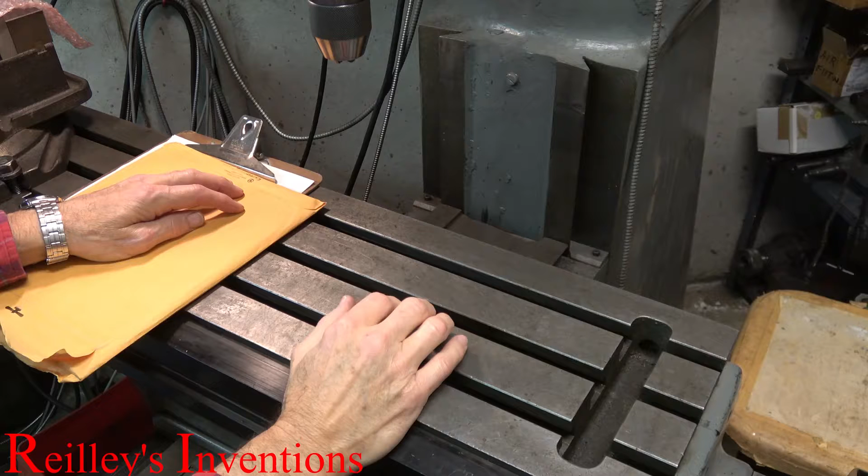I'd like to talk about an invention of mine that projects an image onto a screen. This is a novel way of doing it. Back 20 years ago, when I got the patent for this, projection TVs were a thing, and I thought that this might be a way of building a projection TV using a different method than the then current method of just projecting using lenses.

The advantage of this is that there is no focus. It never goes out of focus, very similar to a pinhole camera, and it uses the idea behind a pinhole camera for one axis only. But projection TVs are no longer a thing. They were a thing 20 years ago. I have no idea what use there may be for this these days. The patent is expired. I'll show how it works, and you can use it however you like.

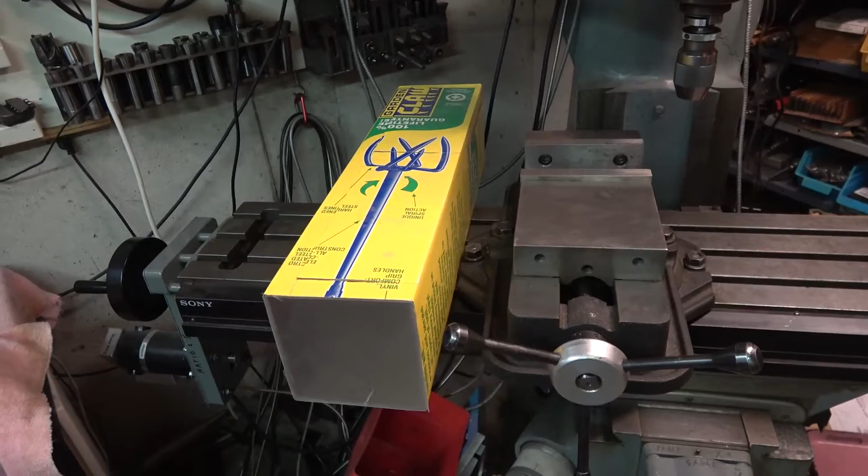Here's a demonstration of the lenticular viewing device. I'll turn off the room lights so we get a shot of the projected image. I'll zoom in, okay, and you can see the stick man. Go to the view from the right. You can see he remains. You go to the left, he remains. You move up, you can see he moves off screen.

And let's have a look inside the box. And you can see the stick man that we're viewing. In here, you can see the slit that we're projecting. And on the front, I'll zoom out a bit. In the front, this is a piece of lenticular lens plastic sheeting. The lenticular pattern is vertical. It has to be in the same direction as the slit.

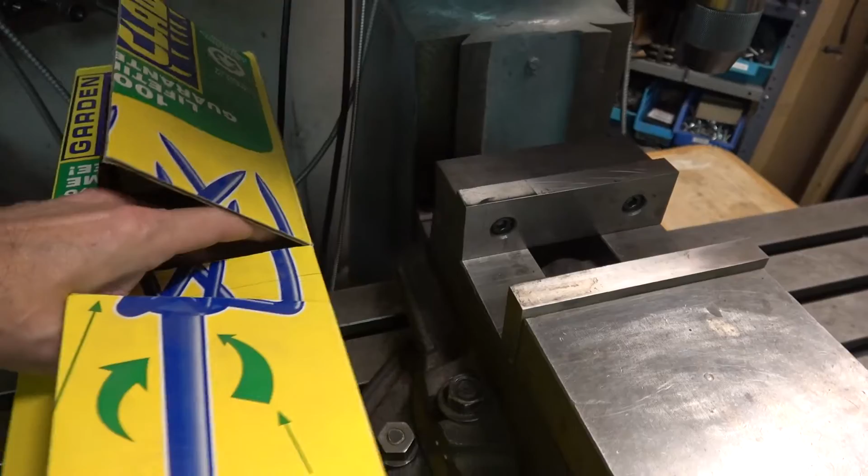And I'll take the slit out, and you can see the slit is just a piece of cardboard with two aluminum sheets taped very close together. Nothing really magic about it. The whole thing is just a cardboard box with a stick man as the view, and the lenticular screen generates the image.

There is no lens. It has the characteristic of being always in focus, very similar to a pinhole camera, and by moving the slit back and forth, we can change the magnification in actually one direction only, in the horizontal direction. In the vertical direction, the size of the image will remain constant even as we move the slit back and forth. In the horizontal direction, the image will be magnified or shrunk, just like with a pinhole camera.

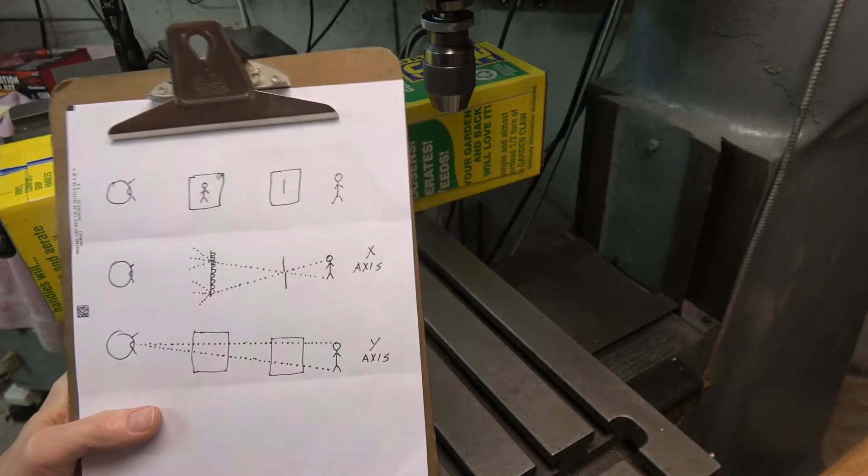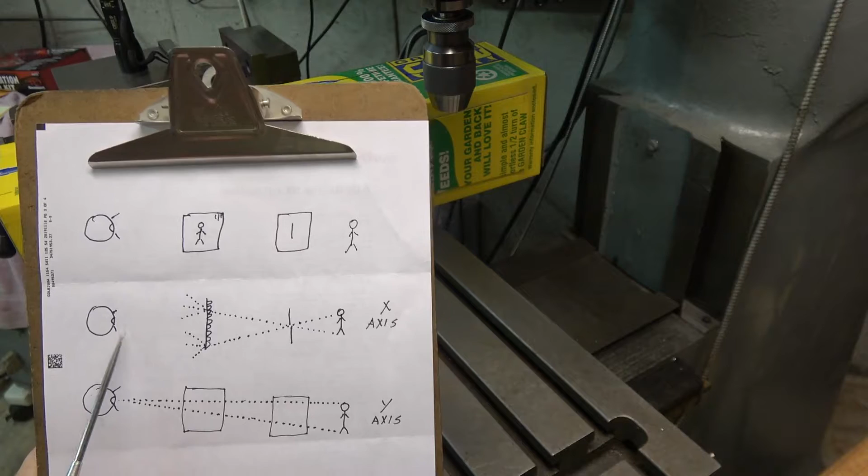This is a diagram illustrating the method for understanding how the image is created in this optical system. This is something where I noticed the effect, and it took me some time to understand how this could actually work. And this is the explanation that I came up with. This is a diagram representing the elements. This is the object being imaged.

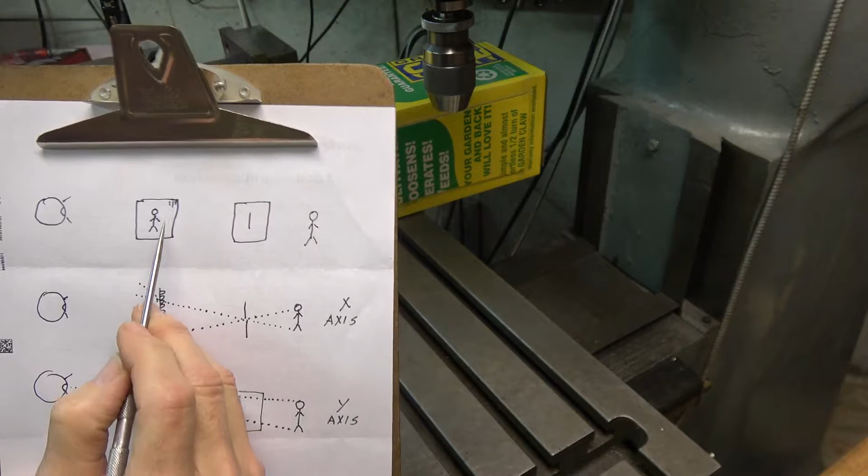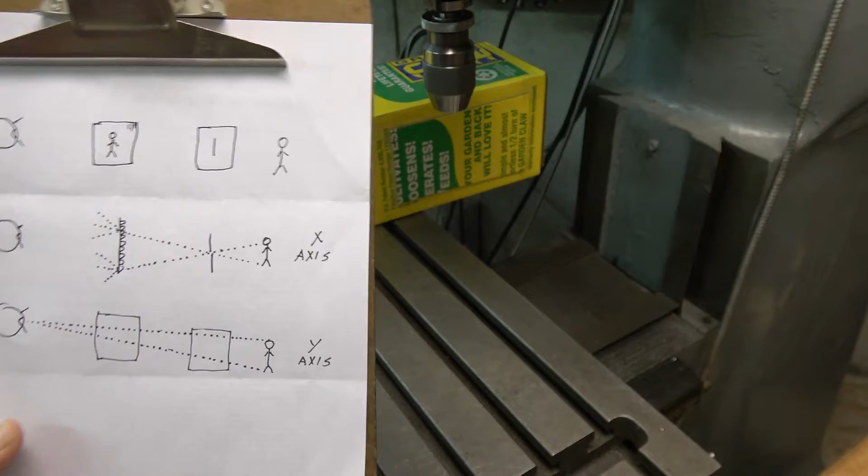This is the slit. This is the lenticular screen with the lenticular elements, the cylindrical lens elements running vertically. They're always parallel with the slit, and this is the object imaged at the lenticular screen. This is the viewer, this is the eyeball of the viewer that will see the image. The explanation that I came up with was to consider the x-axis and the y-axis separately. The x-axis represents the view from the top.

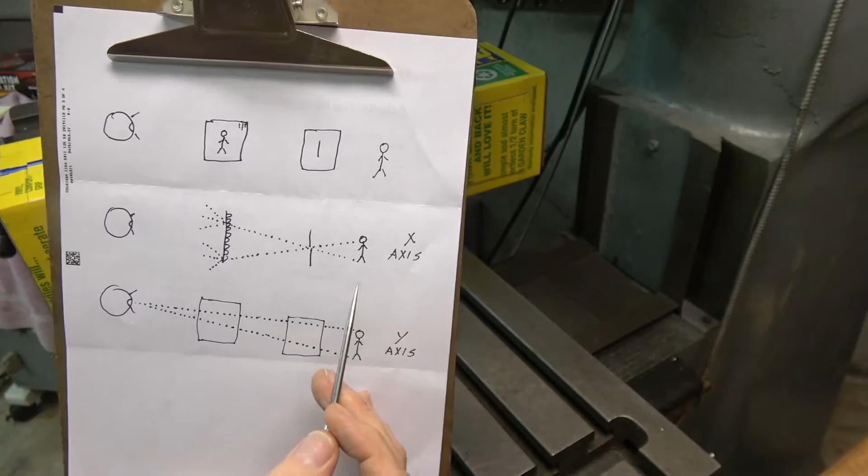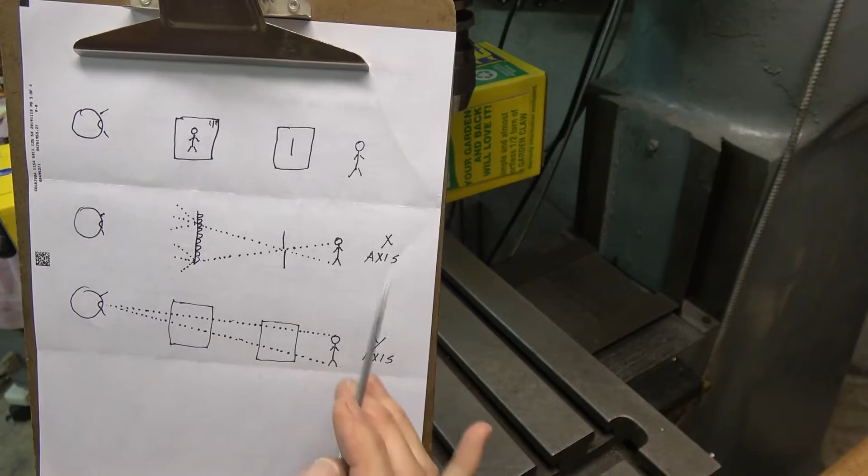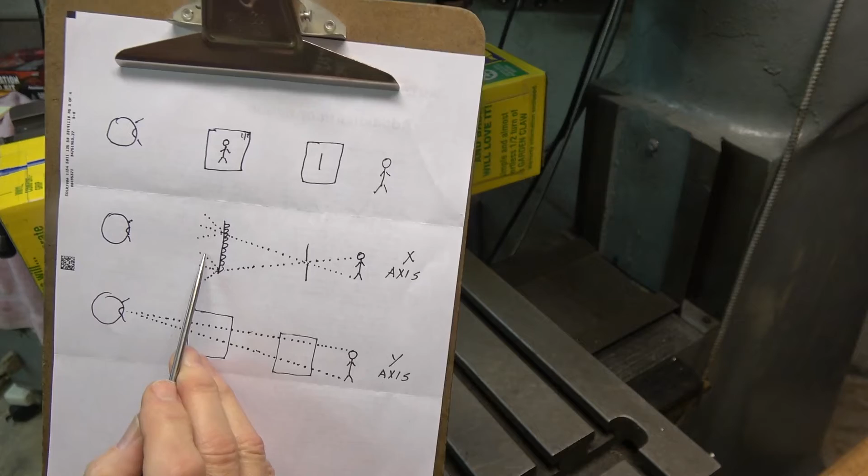So looking down, and in that view, the slit is simply a pinhole, and the lenticular screen acts as the same thing as a ground glass or a translucent screen. So in this instance, the object is imaged with light, the light rays passing through the slit, impinging on the lenticular screen, and the cylindrical lenses in the lenticular screen spread the light in all directions.

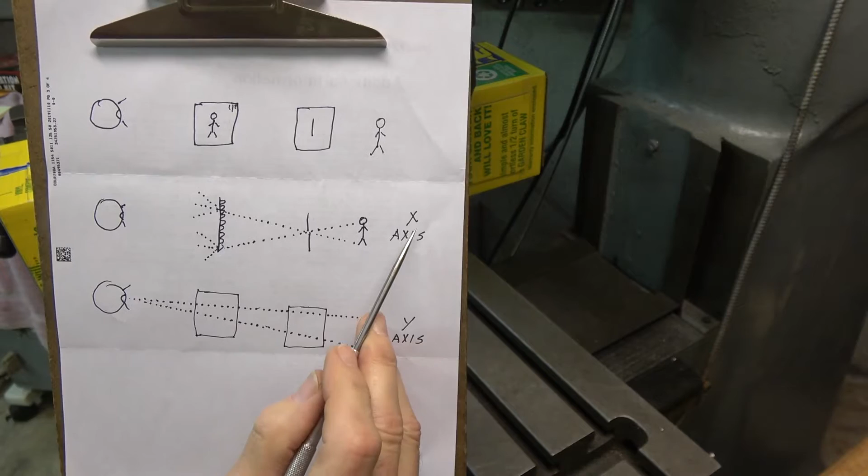This ray passes through and impinges the lenticular screen, and the light is also diverged. Some of these diverged rays will enter the eye, and as such, in the x-axis, the object will be imaged at the lenticular screen, or you could consider it the ground glass in this case. The eye looking here will see an image here.

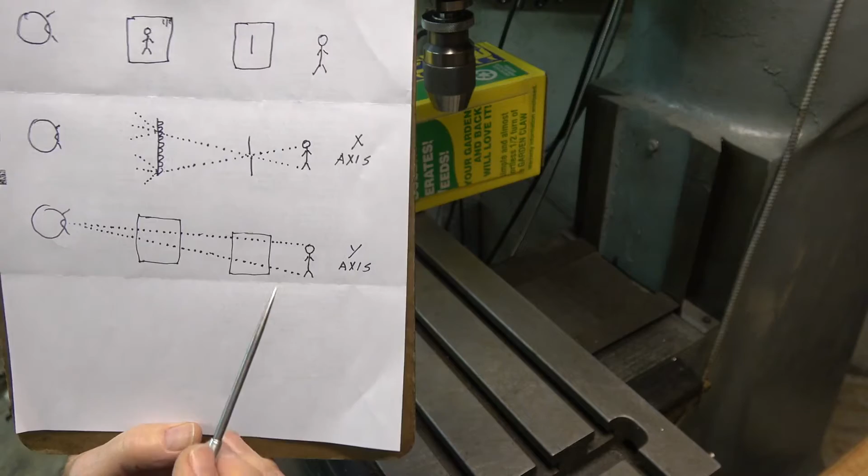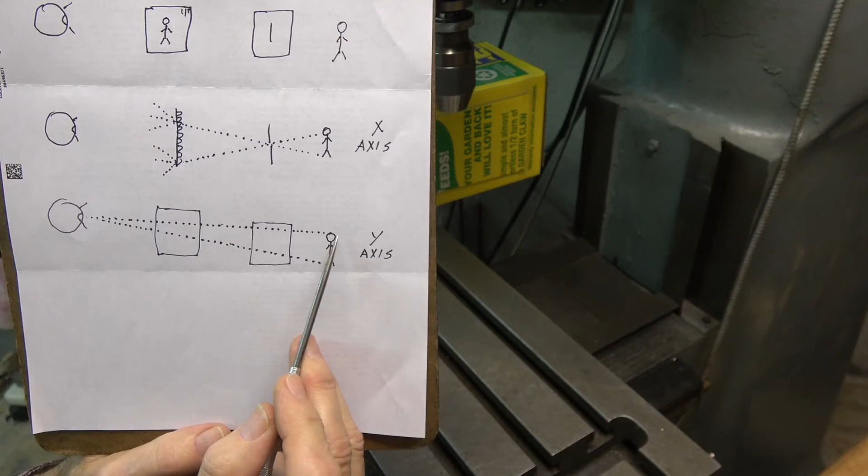In the y-axis, which is in essence looking at the system straight down, in this axis, the slit is just simply wide open. It has no effect on the optical path. Likewise, the lenticular screen has no effect on the optical path. In this case, the light rays from the object that you're imaging pass straight through the slit, straight through the lenticular screen, and arrive at the viewer's eye.

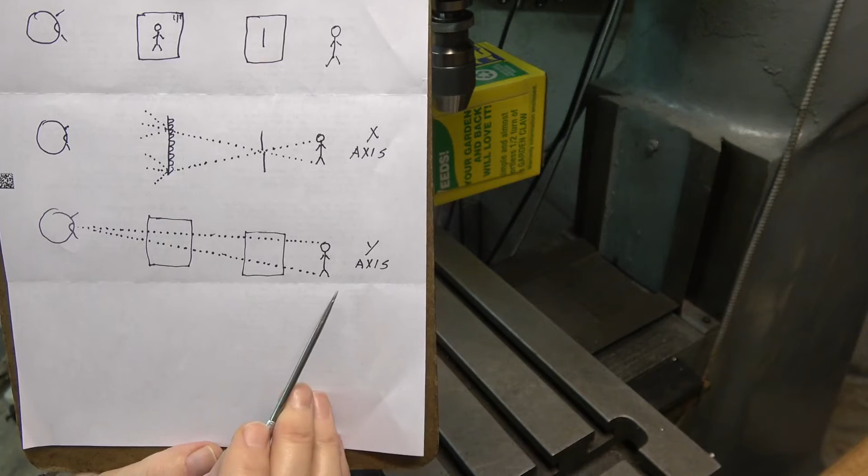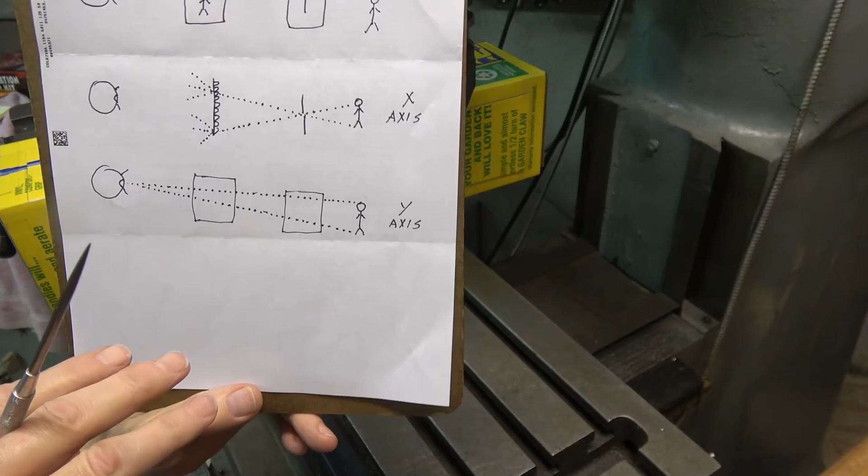Likewise, this ray. So in this circumstance, the viewer will see the image at this depth. In this view, the observer will see the image at this depth. This results in an astigmatic display. In other words, it is an image whose focal length is different depending on the axes of the measurement.

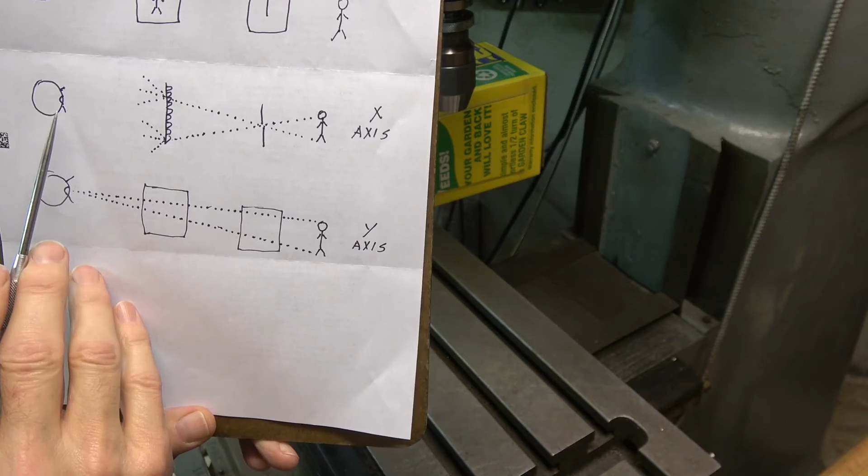So even though it appears that the astigmatic effect is quite large, the image is actually nevertheless viewable, as I showed in the demonstration here. And this is the explanation that I came up with for why this effect works.

This is a patented invention of mine. However, the patent is expired, so anybody can do anything they want with this. It was patented on October 26, 1999, and the patent number is 5971547.